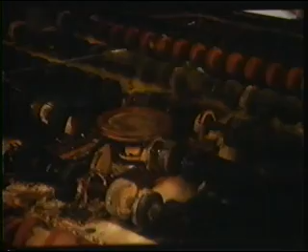Welcome to the edge, the cutting edge of the future. Ford's future, and your future.

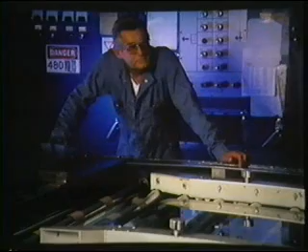At the Nashville glass plant, nothing stands still. The UAW and Ford are running to meet the future, and to meet it with state-of-the-art technology. Advanced automation sets the pace for efficient, safe production. And when it comes to quality production, nothing stands in our way. Continuous production means we succeed in meeting the demand for our products all day, every day.

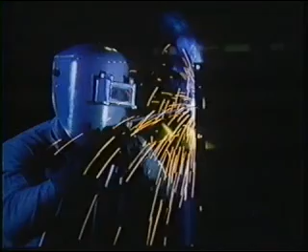At Ford, quality is job number one. To the UAW and Ford, product equals quality. On that, we stake our reputation.

With a wide range of superior products, we've got what it takes to meet and beat the competition. And the payoff? Millions of satisfied Ford customers and the pride of a job well done.

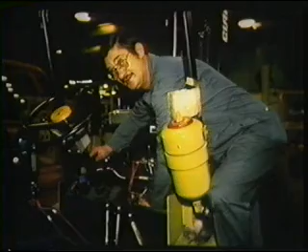At Nashville Glass Plant, our people make it happen. The UAW and Ford believe that you are our greatest asset, because all of you contribute to the company's success. By training and developing our people well, we know we're investing in the greatest of all resources, people.

People with commitment to quality. People working shoulder to shoulder as a team. People with the spirit to win and to meet the challenge of tomorrow.

Advanced technology, superior product, the enormous contribution of our people, these are what make Ford Glass Plant great and put us on the cutting edge of a brilliant future.

An orientation to the plant and production processes at Ford's Nashville Glass Plant begins with the most visible elements of the skyline. These stacks mark the beginning of the 3 glass-making furnaces where the raw materials are heated into molten glass. Behind the plant, over 3,000 rail cars of materials are used each year.

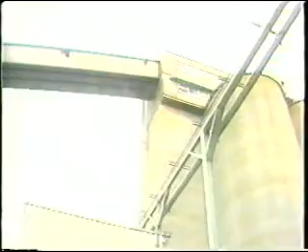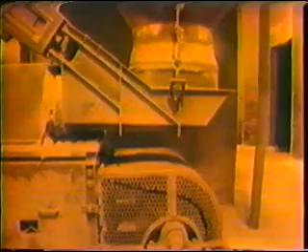The primary materials, sand, dolomite, and soda ash, are carried by conveyor to a mixing facility called the batch house. The word batch refers to the mixing procedure. Each ingredient is loaded into a series of containers by weight. The containers are emptied onto a conveyor, and the ingredients are carried to a mixer.

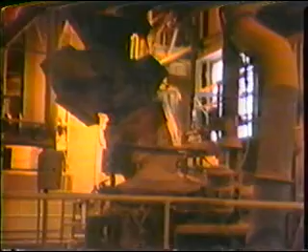The final mix is carried on a cable-driven rail system. The container is called a hopper. The hopper is pulled up 3 stories and changes to a monorail system to travel over to the furnace area in the main plant building.

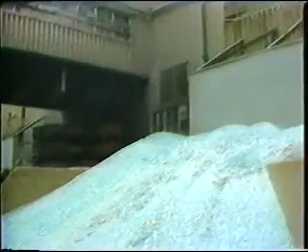This glass is called cullet. Cullet originally referred to trimmings in the glassblowing process in 18th century France. Today, cullet is produced in the cutting operations.

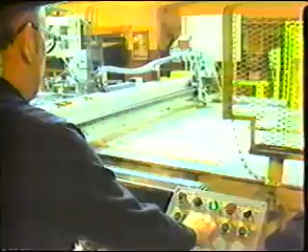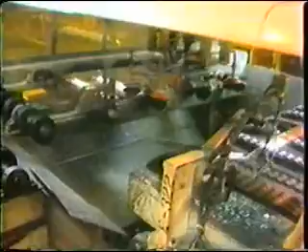This trim and all broken or damaged glass products are fed into a conveyor system and carried to the batch house. Remember that cullet is valuable and remelted. Do not mix trash into our glass products. Up to 50% of the batch is cullet because the glass chips melt at a much lower temperature than sand. This allows the furnace to run at a cooler temperature, which extends the time between overhauls and lowers energy cost.

This hot end area is only the beginning of the furnace. The furnace area departments are in the 400 series numbers. The furnace is a continuous processor that extends over half the length of the plant.

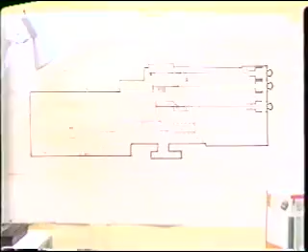The liquid glass floats out of the furnace onto a pool of molten tin. The glass is now a continuous sheet as wide as the furnace. Cogwheels keep the glass stretched across the furnace. The sheet of glass is pulled forward by rollers as it cools.

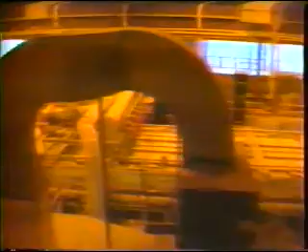Inspectors watch the continuous stream of glass. Laser inspection is also used. The diagonal run of the cutters match the speed of the line and produce a straight cut. The end of the line is known as capping because each load is capped when full.

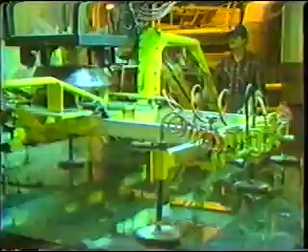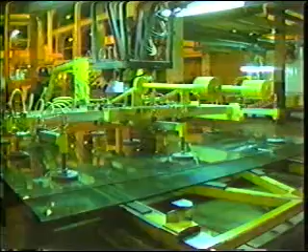Again, for reference, we'll return to the capping area. There are 2 product groups, windows for buildings and windows for cars. Glass for buildings is a finished product and is crated for shipment. We produce over 350 million square feet of these products a year. The 3 float furnaces and the storage area for building glass take up nearly half of the floor space.

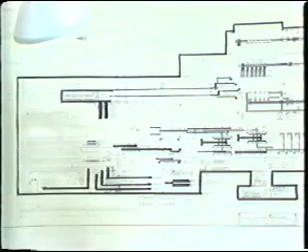Automotive glass is divided into the 3 window areas of the car: front, back, and side glass. The 3rd automotive product area is side glass or body glass, and the departments are in the 500 series numbers. They have 8 cut and grind lines. They have 5 separate lehrs.

This group handles 16 products at one time. Cut and grind lines 3 and 4 are paired and are similar to 6 and 7. To understand the production flow, we'll follow a piece of glass as it moves through the system.

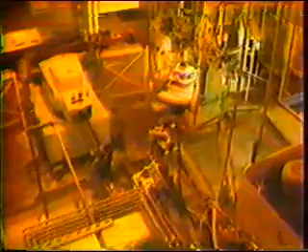The finished template is transferred to the hole drill station, which is an automated drill press.

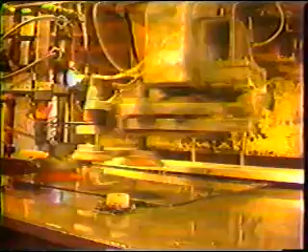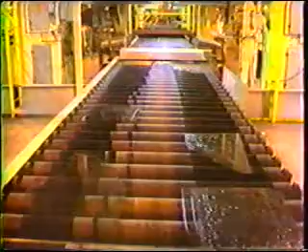You can see 4 final transfer units here feeding this washer conveyor. There are 4 operations like the one we just saw clustered around this washer conveyor, producing 4 different products. The 4 parts are packed in different boxes. We consider this 2 lines, and they are numbered in the packing area for reference.

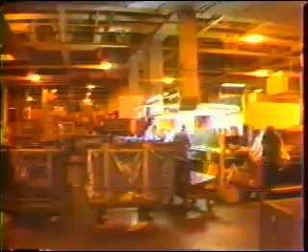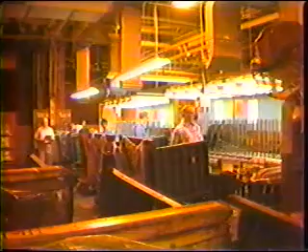Right behind them is an identical operation feeding a central washer conveyor. Behind them is the paint room for body glass.

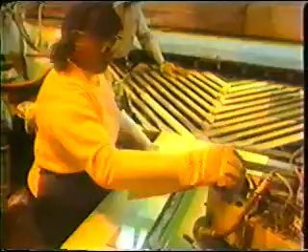There are 2 more lines in this area next to the wall of the cafeteria. These 2 lines are manual. The glass is carried vertically down the line. The lines are back to back. The manual system scores the blank or glass stock by hand, and the trim is broken off by hand. The seaming and hole drill require manual transfer.

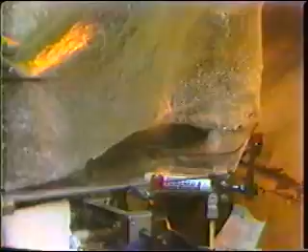Next is a hybrid line. It uses the same arrangement as the automated lines and uses the conveyor system of the manual lines. This was the first automated line at the plant.

Around the corner, all of the Department 500 lehrs are found. The first is a press form lehr. The tongs are preheated. The parts are preheated. This is a gas lehr with burners in the walls. At the end of the lehr, the parts are pressed into the mold shape and quenched by cool air.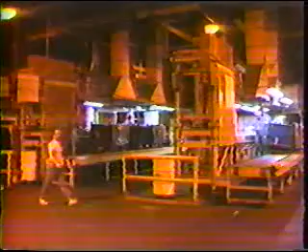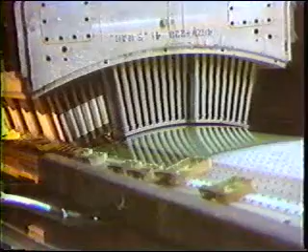This is Lehr number 2, a gas-fired furnace. Forced air lifts the glass off the slide and the chain pulls it through the lehr. The gas burners are in the roof. This bend was developed gradually into this final curve in the lehr.

The lehr next to it is controlled by computer. The newest line in the plant is also part of the 500 department.

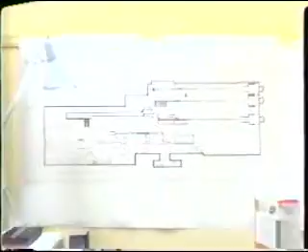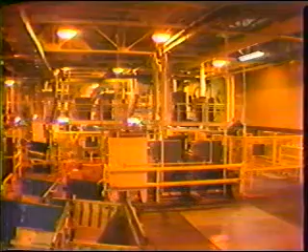The 600 series departments produce backlights or back windows. The line begins off of the main aisle at column D57. From beginning to end, a backlight takes 8 minutes to go through the line. This was the first continuous operation line at the Nashville glass plant.

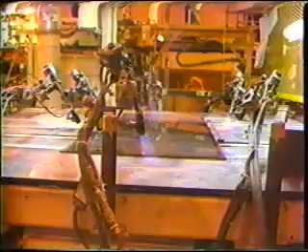It uses the NC or numerically controlled cutter and the flame stripping. The 4 arms load and unload the templates into the Sun Tool grinders. The Sun Tool grinds the edge down to a beveled satin finish. The coolant liquid keeps the diamond cutting wheels from burning.

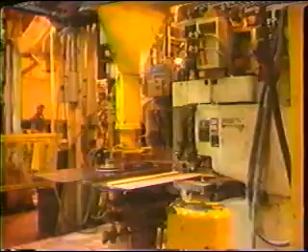The line has hole drill equipment not required for this particular product. The washer prepares the template for the paint room.

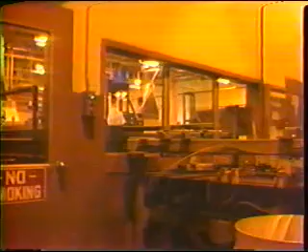The silkscreen process is used. The special paint dries instantly under ultraviolet light. This paint contains silver and becomes the defrost circuit for the backlight.

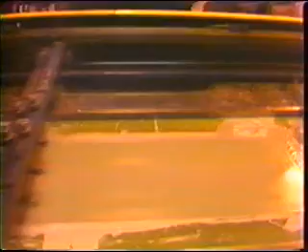The paint room accumulator holds 75 painted backlights. This operation positions the backlights on the lehr conveyor. The silver paint will be cured by the heat of the lehr.

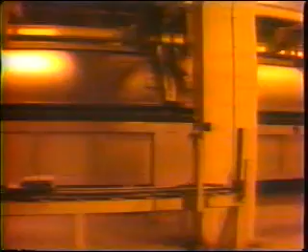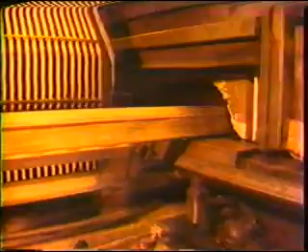This lehr is an electric roller hearth, distinctive for the 200 ceramic rollers that transport the backlights. At the end, the glass is picked up by vacuum pressure and dropped into the shuttle carrying a bending frame. Cool air quenches the glass and sets the form. Compressed air from the bottom pushes the backlight up off the bending frame.

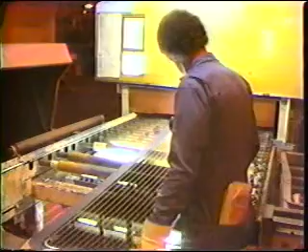This cooling conveyor brings the temperature the rest of the way down. This finished product will be sent into the pigtail operation 50 feet away.

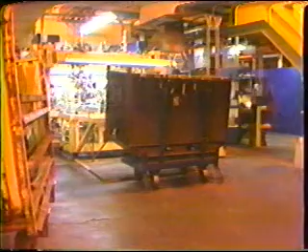The term pigtail refers to the wires that will connect the painted silver lines in the backlight to the car's electrical system.

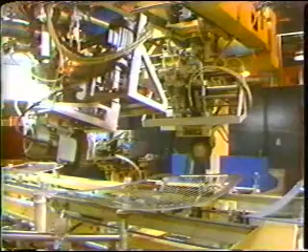This operation actually attaches the clips or connections for those two wires. A buffing wheel roughs up the surface. A jet of hot air solders the clip onto the silver painted surface.

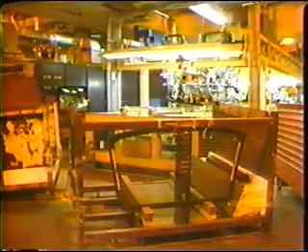The final station checks the circuit and solder weld. This finished product will be sent to either Chicago or Atlanta and becomes part of a Ford Taurus.

The 700 series line is a newer version of the previous line, the 600 series. Both produce backlights. The technology is substantially the same. The NC cutter station, flame stripping.

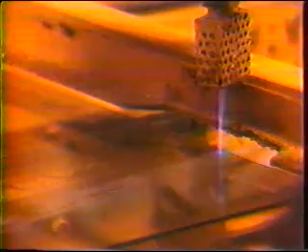The grinders are numerically controlled models and can handle larger products. The Unimate robot serves the purpose of loading and unloading the two grinders.

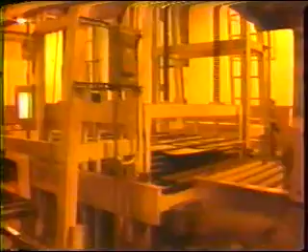The advanced washer was engineered as a team effort in the plant. The cut and grind accumulator has a capacity of 71 pieces. The paint room features complete backup painting assemblies that can be rolled into place.

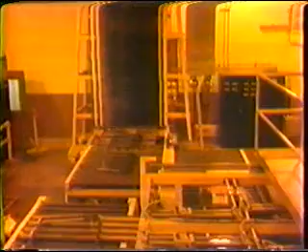A new lift system raises the backlights to the lehr conveyor. This is also a roller-type lehr.

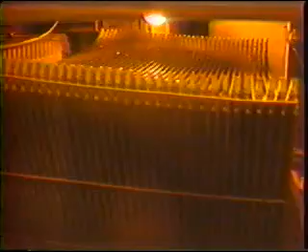The quench features a quick change form for product changeovers. The quenching process sets the glass to break into fragments. The federal standard for this type of safety glass is no larger than 4 1/4 grams per piece. Every 30 minutes, a backlight is tested for the break pattern.

Windshields are made in the departments in the 300 series. The first stop for windshields is the cutting department. These 6 cutting lines are near the cafeteria.

The NC, or numerically controlled cutting table, scores the blank or stock without the aid of a physical template.

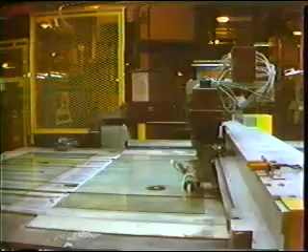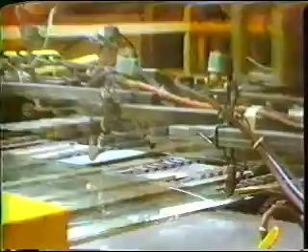The glass is conveyed to flame stripping, where the trim is heated, and breaks at the score marks. The trim is dropped onto the cullet conveyor, and the cutout template is conveyed to the edge grinding or seaming operation.

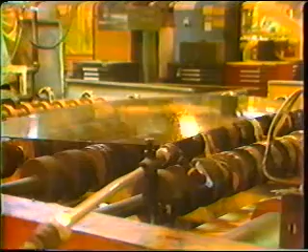Diamond wheel seamers remove the sharp edges of the upper and lower surfaces of the template. A rotation device spins the template for the next seaming operation. Now all 4 sides have been seamed.

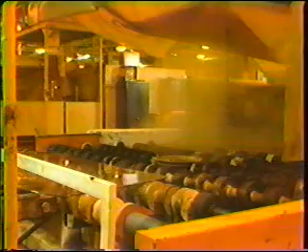A hot water washer is used to clean the template of glass chips and cutting oil. The washer delivers a dry template to the inspection station.

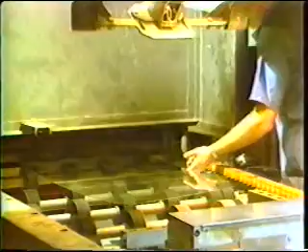There are 6 cutting lines for windshields, and 4 will be in operation at any time to meet the demand.

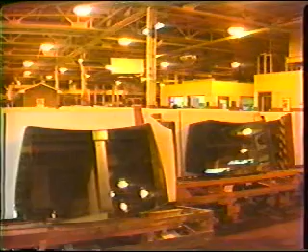One windshield is actually made up of two pieces of glass sandwiched together and held by a vinyl film. The outside piece of glass is cut slightly larger to compensate for the bending curve, so that the sandwiched edges match up evenly in the finished windshield. There is a short or inside template and an outside or long template.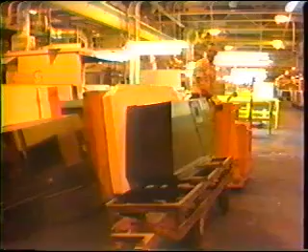The templates are trucked over to the main windshield line. This large area for windshield cutting is separated from the rest of the line, which continues here at the center of the building and extends almost to the other end of the plant.

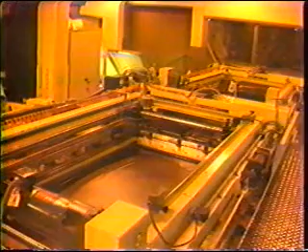These two robots load the short ends into a central paint room. The short ends pass through a pre-paint washer and into the paint room. The silk screen painting system floods the surface with paint on one stroke. On the second stroke, the squeegee forces the paint through the pattern in the silk screen.

Meanwhile, the long end has come around the corner of the building where they will meet at the pairing station. A supply of pairs is ready to feed the line when the paint room does routine and emergency maintenance work.

The leer is a furnace where the glass is heated and bent to shape. A loading shuttle places the pair onto a metal frame for the ride through the furnace. The temperature reaches 1100 degrees in a series of steps or zones of temperature.

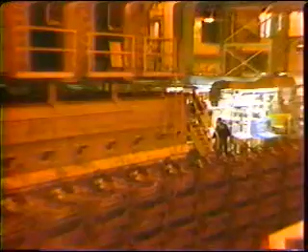Each pair is unique in the exact pattern of the bend. If one is damaged, the other is unusable. The pair is separated and flipped over for the next washing station.

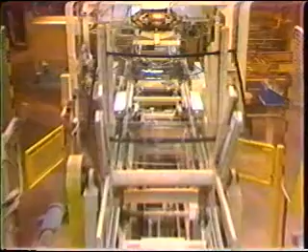A final wash before the lamination room. The long end comes through first and then the short end. The vinyl is positioned and the long end placed on top. The trim is removed and recycled.

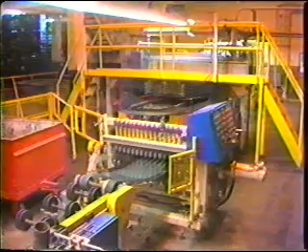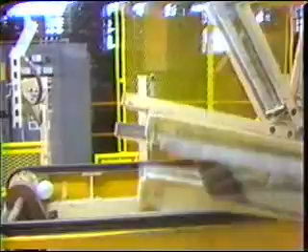The sandwich is heated in an oven briefly to warm the vinyl. The air is squeezed out by the rollers. The same process is repeated at a higher temperature. The second set of rollers seal the sandwich closed at the edges. The mounting bracket for the rear view mirror is attached here.

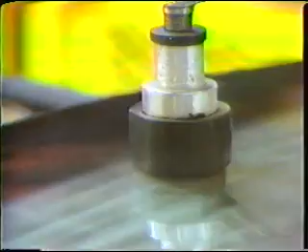The windshields are grouped onto racks and taken to the final process, the autoclave. The autoclave is like a pressure cooker for 12 racks of windshields at a time. At the other end, the 12 finished racks are pulled out automatically. The rear door is cranked closed to seal the next group.

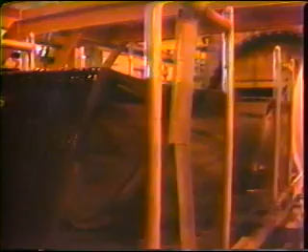It pressurizes to 250 pounds per square inch and heats to 250 degrees Fahrenheit. The pressure removes any air left in the sandwich. The heat turns the vinyl from frosted to clear as it bonds the pair together. The result is a finished product. The windshields are mounted on a conveyor for final inspection.